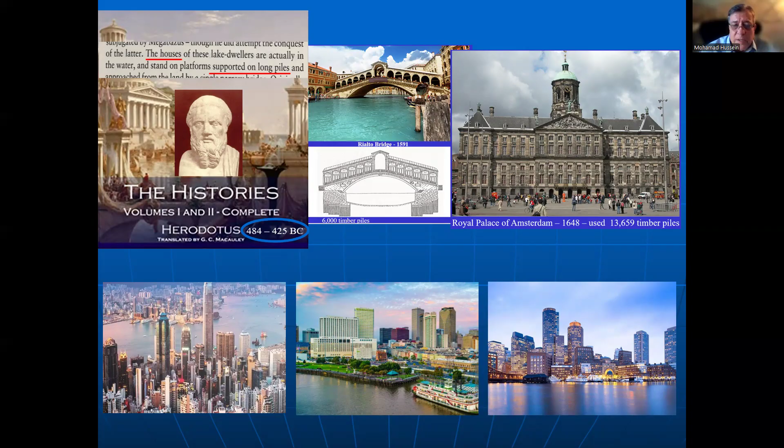So the presentation will be about deep foundations, their different types, and testing methods for geotechnical load-bearing capacity and structural integrity evaluations. Deep foundations have been used since antiquity. Herodotus mentioned driven piles 2,500 years ago in his writings. In fact, we still have structures nowadays that are hundreds of years old supported on deep foundations. One may say that deep foundations are what make our civilization possible by allowing us to build all of the structures needed for modern civilization living. In today's practice, deep foundations are used to support all types of structures and all kinds of geotechnical conditions to resist all kinds of load combinations.

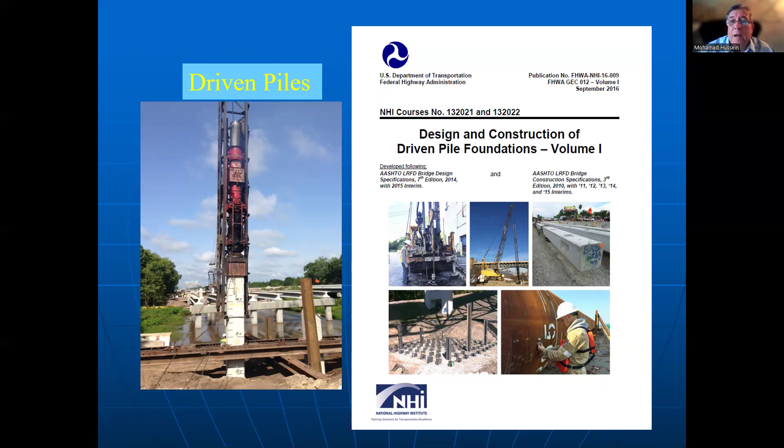Deep foundations can be divided in a variety of ways. I will divide them today into three major categories, including driven piles. By the way, there is a 3-volume manual on design and construction of driven piles available to you for free that you can download in PDF form from the website fhwa.dot.gov. At the end of the presentation, I will indicate to you my email address. If you'd like, I can send you a link to all of what I'm going to suggest to you today. So we have driven piles.

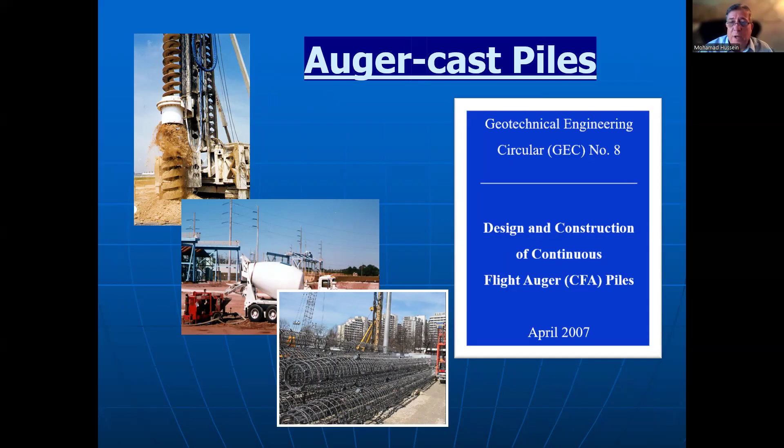We have auger cast piles that are a type of cast-in-situ foundation. There's also a manual for that you can download. And drilled shafts. So these are the three different types of deep foundations I will be talking about today. There is a 2-volume drilled shaft manual as well that you can download from the website.

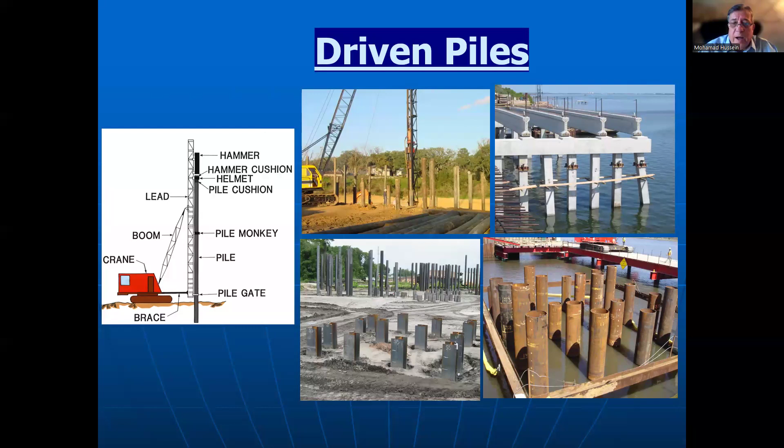Driven piles consist of wood piles, timber piles, concrete piles, and steel piles. Timber piles are typically used to support lightly loaded structures. There is another manual here you can download for free on the internet for the design and construction of timber piles. Steel piles come in 2 varieties, H-section and pipe piles.

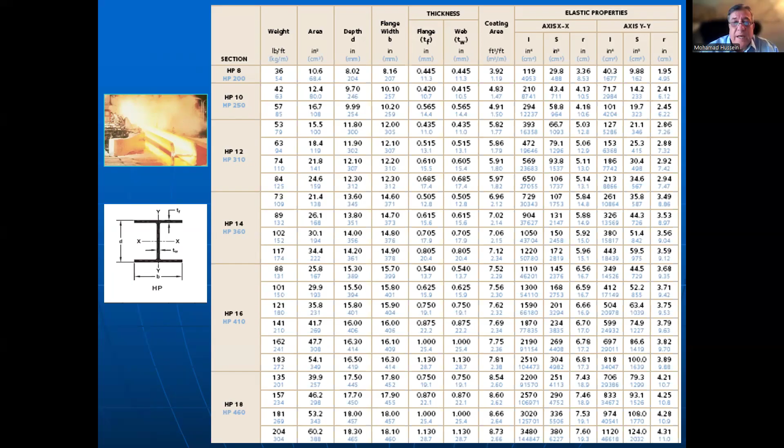There are about 20 different standard H-pile sections available for use, and there are design tables to assist you in the design of these different sections and cross sections of H-piles. Steel pipe piles come in a variety of sizes, ranging in diameter from a few inches to a foot or two, to maybe 5 feet, to more than 10 or 15 feet. So they range in size, diameter, wall thickness, and length as needed.

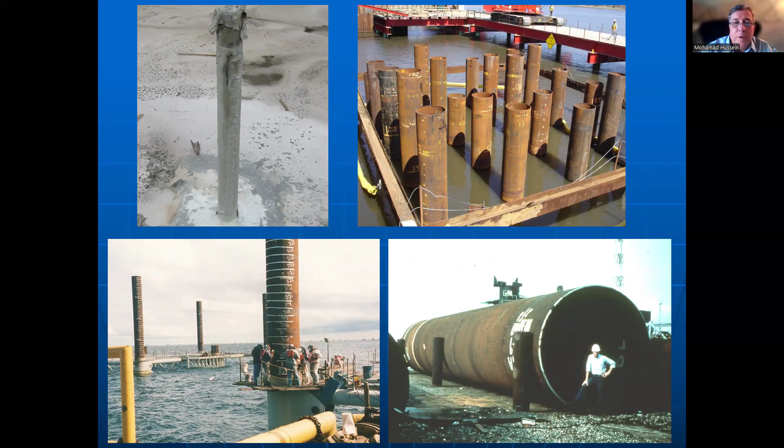Concrete piles are typically pre-stressed concrete piles, having a compression strength of about 6,000 psi, or they can be post-tensioned and may have a strength of maybe 10,000 psi. The newest development in concrete piles is the use of ultra high performance concrete in driven piles, with strength that can be upwards of 25,000 psi.

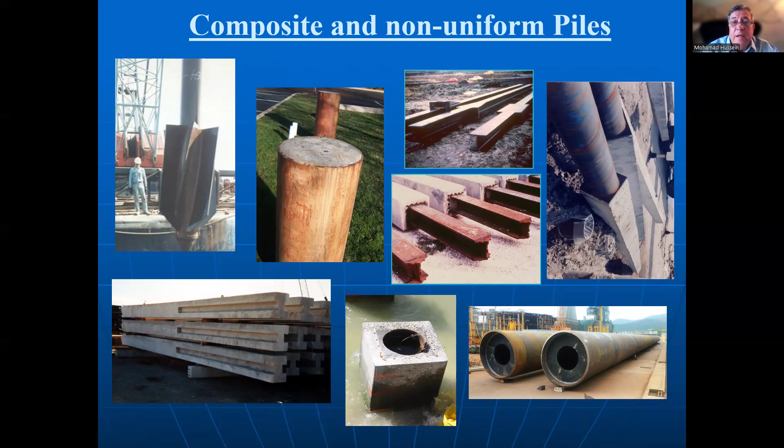Piles can also be composite and variable in sections. They can be different combinations of steel and concrete and can have highly variable profiles depending on the need for the foundation design and the loads they're supposed to support.

There are hundreds of different pile driving hammer models available to install and drive these piles into the ground, and they can operate by hydraulics. We may have hydraulic hammers, air hammers, diesel hammers, single acting or double acting. So there's a variety of different options available for the driving of these driven pile foundations.

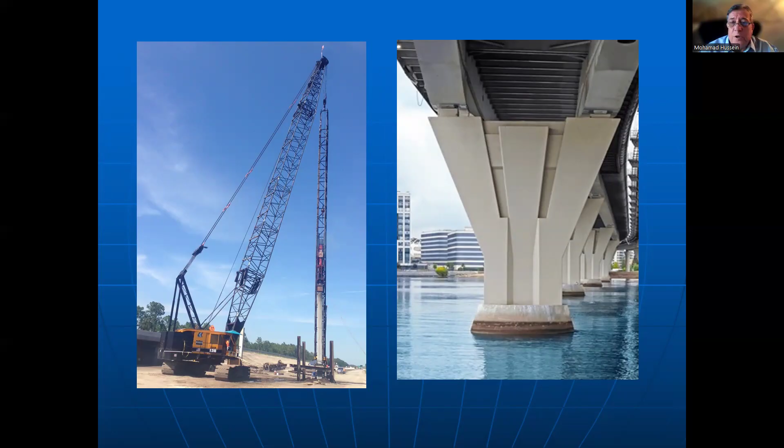So we drive piles individually into the ground, typically in a group. We may drive a group of piles to support the structure we're trying to found. So this is a pier foundation, and this may be a building. We will drive a whole lot of piles, large pile groups, to support the various structures.

During pile driving, the soil resists the pile by dynamic pile driving resistance dynamically. However, when we use the pile as a foundation unit, we need its static load bearing capacity. And there is a difference between the static load bearing capacity and the dynamic pile driving resistance to driving.

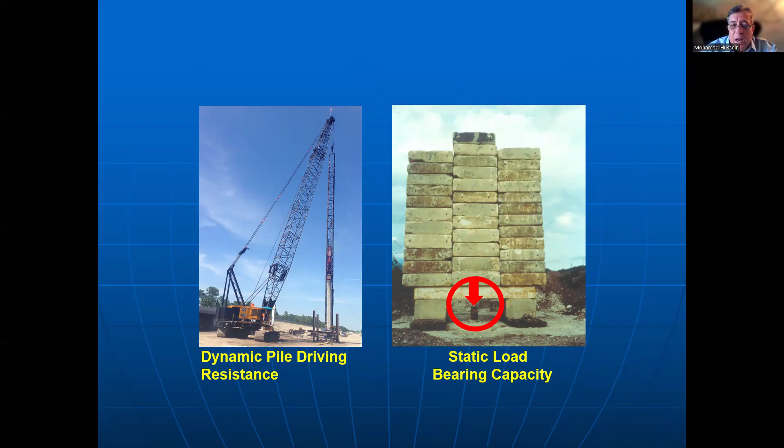So the best way to evaluate the static load bearing capacity after we have driven a pile is to actually perform a full scale static load test, as we see in the picture on the right. We can perform a static load test by using dead weight on top of the pile to see how much it will be able to support statically.

Or we may use reaction piles to support the reaction beam. So we put a reaction beam on top of the pile, we put the hydraulic jack, and then we load the pile hydraulically, and we measure the corresponding load and displacement. So incremental load and corresponding displacement.

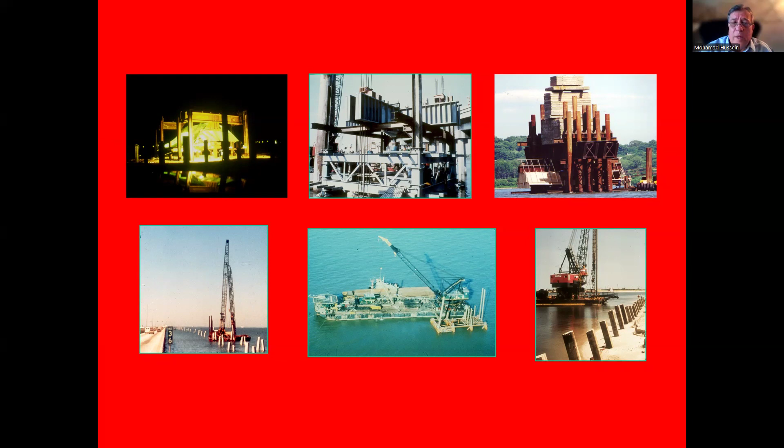So while static load testing is the best thing we can do to evaluate the static load bearing capacity of the pile, it is a very time consuming process. It's very expensive. It may cost 100,000, 200,000, or maybe 500,000 or more to perform a static load test. And in some cases, it's just physically impossible to do. Others may require numerous of these tests on the project. So there are limitations to that approach.

So what we're trying to do is find a relationship between the static load bearing capacity and the dynamic pile driving resistance. In other words, we will try to relate the driving resistance of the pile penetration into the ground, as typically measured by blows per foot or blow count of pile driving, and the tons, the static tons the pile will be able to support in service.

More than just trying to find a relationship, we want to have an equation of however many blows per foot it takes to drive the pile into the ground and how much tons it will be able to carry. This is a nonlinear relationship that we will try to quantify now.

It has been known for a long, long time, since antiquity, that the more energy, the more work it takes to drive a pile into the ground, the more the pile will be able to support. If a pile goes down to the ground easy, as opposed to being very hard to drive, then the harder to drive, the more load it should be able to support.

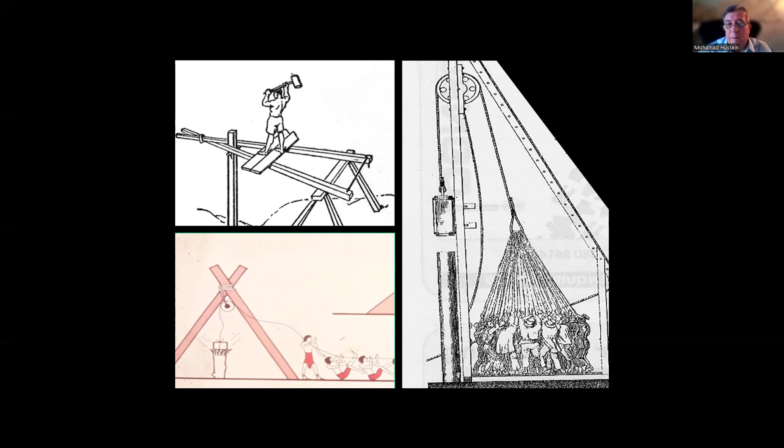So that is kind of a common sense feeling that in 1888, somebody called Mr. Wellington tried to formulate and equate the work it needs to drive a pile and the resistance the pile will be able to support. So this is called the energy approach.

If we know the weight of the hammer W, the drop height H, and then we hit the pile with the hammer, it penetrates a given distance into the ground S against a resistance R, then we have equilibrium. So we have a relationship WH equals RS, so we can back compute R, which is the resistance of the pile to pile driving.

This is actually pile driving resistance, not the static load bearing capacity. A lot of people try to improve on that very simple relationship from 19th century technology, and there are many of these on record, like 400 of them. They are nothing but a variation of the same approach. Some can look complicated, but really not much improvement over the basic equation, so not very good to use nowadays in the 21st century.

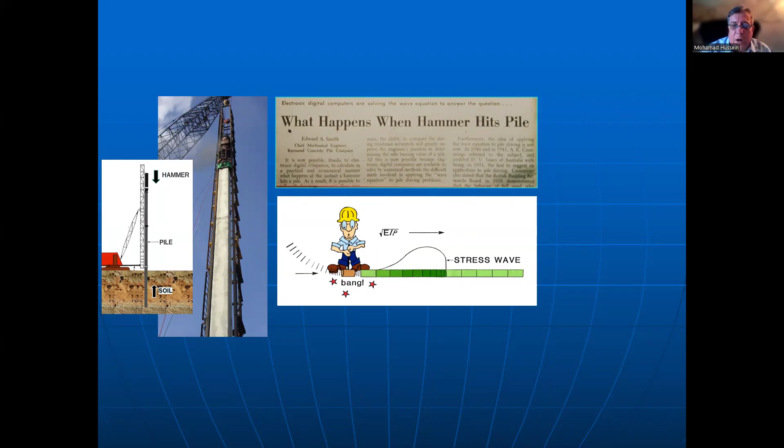So let's look further into what happens when the hammer hits a pile. What are the fundamental mechanics of pile driving? It has been realized that pile driving follows the process of wave propagation, one-dimensional stress wave propagation. When the hammer hits a pile top, a compression stress wave travels elastically in the pile back and forth at a very high speed, like 15,000 feet per second.

Mr. Smith in the 1950s realized that and wrote a computer program called the Wave Equation Analysis of Pile Driving. In fact, this computer analysis was the very first application of digital computers in civil engineering. Mr. Smith wrote this program to be used in-house in his company called the Raymond Concrete Pile Company. Later on, the United States government commissioned a group in Ohio, which later became the GRL group, my group, to write a public program for the analysis of pile driving using the wave propagation principles.

So the WEAP program, or GRL WEAP program, is a simulation program using numerical analyses that follows the stress wave down the pile and the soil resistance against pile penetration, and comes up with this relationship of blow count and static load bearing capacity by taking care of the dynamics of the soil resistance damping effects.

So for any pile drive, for any capacity we need the pile to support, for any design load times the factor of safety, ultimate capacity, this equation, this program will tell us how many blows per foot we need to continue driving the pile to achieve that resistance. That is what the inspectors use on the job site as quality control and quality assurance for pile driving, to make sure that the pile reaches the required blow count that achieves the required resistance.

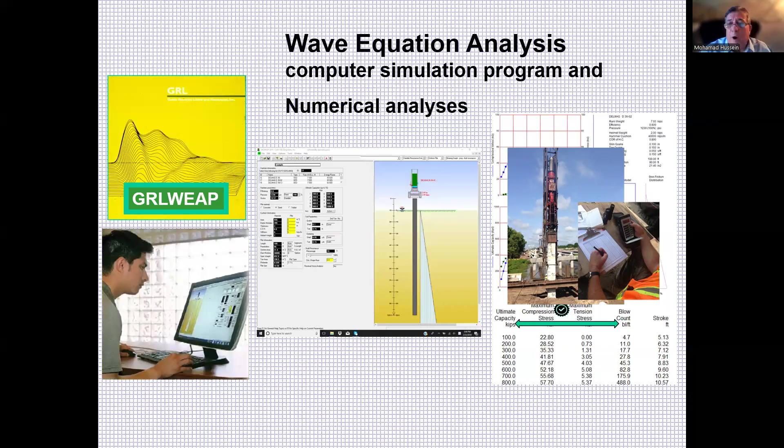However, being a computer program, a simulation program, it relies on assumptions. There are a bunch of assumptions one has to assume and plug into the program to come up with results. Although it is a very powerful program, its reliance on assumptions means that it has potential sources of error.

For example, hammer performance. We have to assume a certain level of hammer performance in order to make sense of the hammer driving blow count as it relates to the soil resistance effect. Because blow count is not only a function of resistance, it's also a function of hammer performance. So if we are off on the assumption of hammer performance, we will be equally off in relating the blow count to that static load bearing capacity.

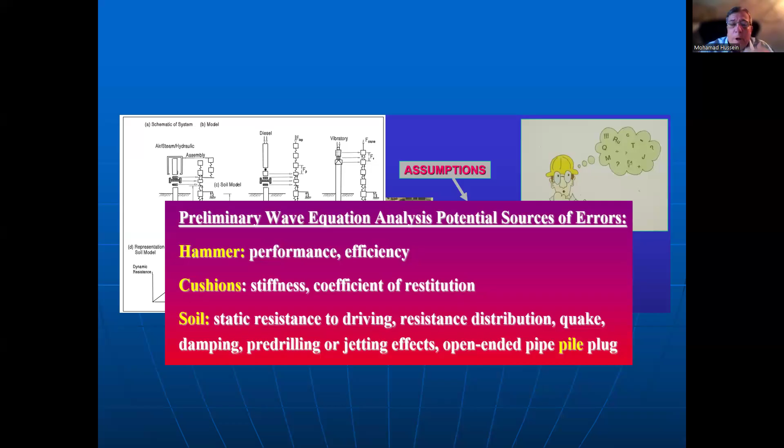But that's something that has to be assumed. Soil-pile interaction has to be assumed as well. A simple example is the open-ended steel pipe pile. When we drive an open-ended steel pipe pile into the ground, it may act like a cookie cutter, or it may plug. Either case will have a very different relationship of blow count and load bearing capacity. We don't know if the pile is going to plug or not, but we have to assume that ahead of time. Because of all of these assumptions needed, there are potential sources of error in the analyses.

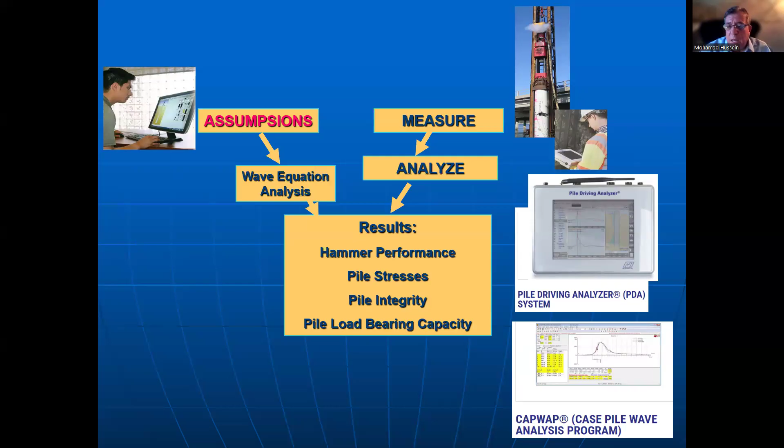So instead of assumptions, what if we were to go out on the job site and take measurements? We will measure what we need to know, analyze it, and come up with results. These measurements are typically done with a computer unit on the job site called the Pile Driving Analyzer, PDA, and the analyses are done with a computer program called CAPWAP, which is a wave equation analysis based on the measurements on site.

So let's start from the very beginning. Again, this is a static load test. We need all of this dead weight, all of this load, to statically load test a pile. We need dead weight.

What if we were to think a little bit outside the box? What if I was to take a very small portion of that dead weight for the static load test, a small percentage of it, put it in a guide, lift it up high enough and drop it in such a way that it gives me the same load on the pile as all of that dead weight load? So both of these processes, both of these procedures, can give me the same load on the pile.

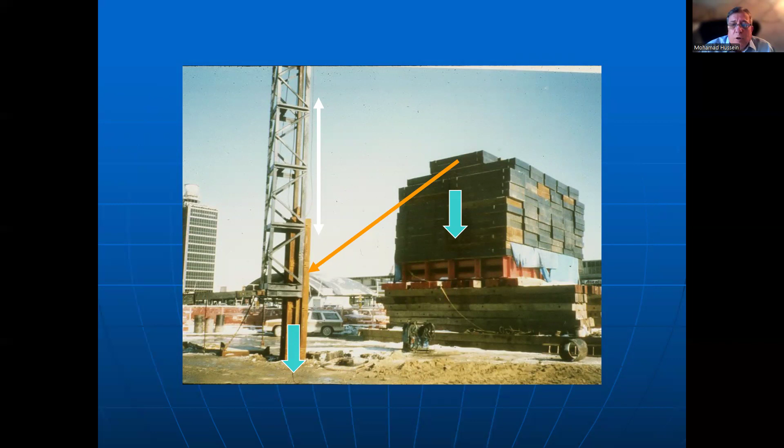So if I can take a small piece of that, I don't need the whole weight. I can dynamically duplicate or replicate the load testing effect. As a matter of fact, I don't have to do any of that — this is being done for me for free.

It's called the pile driving hammer. As the hammer pounds the pile into the ground during pile driving, it's loading the pile with every blow. All we have to do is put instruments on the pile and take measurements during pile driving. This constitutes a dynamic load test, as opposed to a static load test. Dynamic load testing is standardized by ASTM through standard designation D4945.

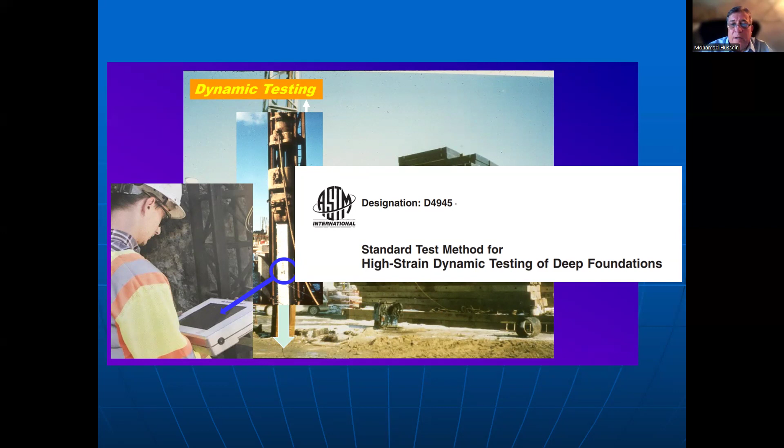Dynamic load testing is nothing but taking measurements on the pile under the impacts of the hammer during pile driving. These measurements consist of a strain transducer measurement, measuring the strain and therefore the force, and an accelerometer. So we need two units: a strain gauge and an accelerometer. The strain gauge measures the load, and the accelerometer measures the motion.

That's like the static load test — remember, we measured load and movement statically. Now we will measure the same thing dynamically under each and every hammer blow.

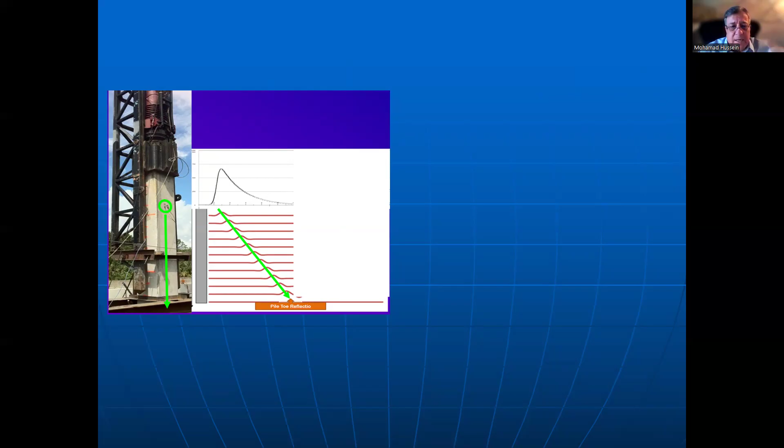So when the hammer impacts the pile top, we put our gauges on the pile. The gauges feel the impact of the hammer, the stress wave as it passes. The stress wave goes down to the bottom of the pile, reflects, and comes right back up where the gauges feel it again. So this is the signature of one blow.

This is a dynamic test result of one hammer impact, showing the impact at the top of the pile and the reflection from the bottom of the pile versus time. This is more like 20 milliseconds, but it can be resolved by the computer.

Since we are taking measurements under each and every hammer blow, we have a complete record of the entire pile installation. If you look on the bottom left-hand side, you'll see the number 1,813 — this is however many blows it took to drive this pile, about 1,800 blows to drive it to 125 feet penetration.

We can group all of these blows into each foot of penetration, because the inspector on site is counting how many blows per each foot of penetration. Each foot will get an average, and this is the same thing shown graphically versus penetration.

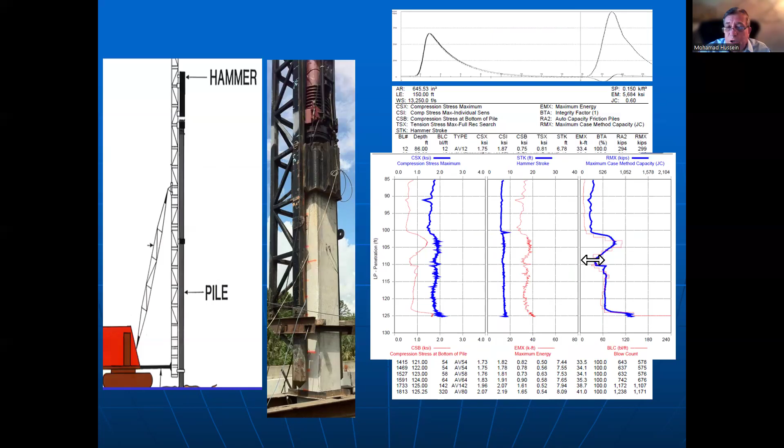If we look on the right-hand side, the blue line versus penetration depth is the static load-bearing capacity of the pile, and the red line is the blow count in blows per foot of the hammer. So now we have the relationship of blow count and static load-bearing capacity during pile penetration depth for each and every foot of driving.

This information can be used to assess and evaluate the hammer performance, the pile performance, and the soil performance for each and every hammer blow.

The hammer runs at a clip of about 50 blows per minute — let's say approximately one blow every second. Between these blows every second, we have all of these results, which I will describe next, that have to do with the performance of the hammer, the pile, and the soil.

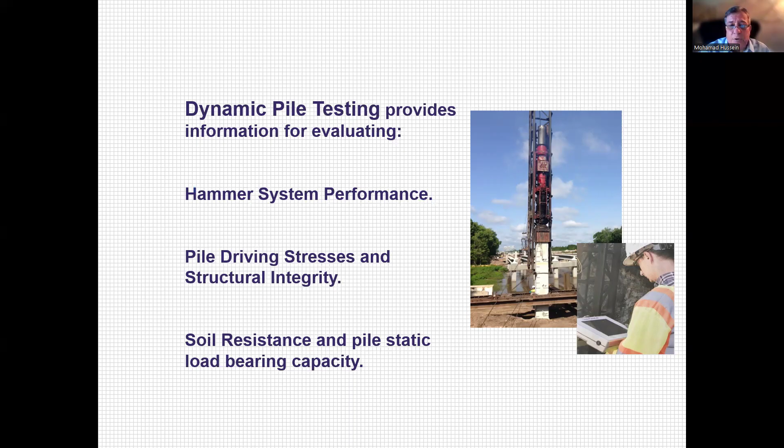The hammer has a rated energy, a maximum potential energy equal to weight times drop height. Every hammer is rated that way. That's its potential energy — it will fall and compress a cushion on top of the pile, accelerate the mass of the helmet, compress a plywood on top of the concrete pile, and finally reach the top of the pile in what we call transferred energy.

So the best measure of the performance of the entire pile driving system is by measuring how much transferred energy actually reaches the pile top. How much do you think is the ratio of transferred energy to the maximum potential rated energy of the hammer? How much do you think the pile actually receives from the hammer?

Well, that depends on the mechanical condition of the hammers, on the state of maintenance, the state of mechanical condition of the cushions inside the hammer, and also the plywood that we put on top of the concrete pile to cushion it so we don't damage the pile. All of these play together in giving us this high variability.

This is why I was concerned when we talked about the wave equation analysis by simulating the hammer, that we have to have a good measure of the efficiency of the hammer if we have to make sense of its blow count in establishing pile load bearing capacity. It can vary widely, so that's why the measurements are needed for the performance of the hammer.

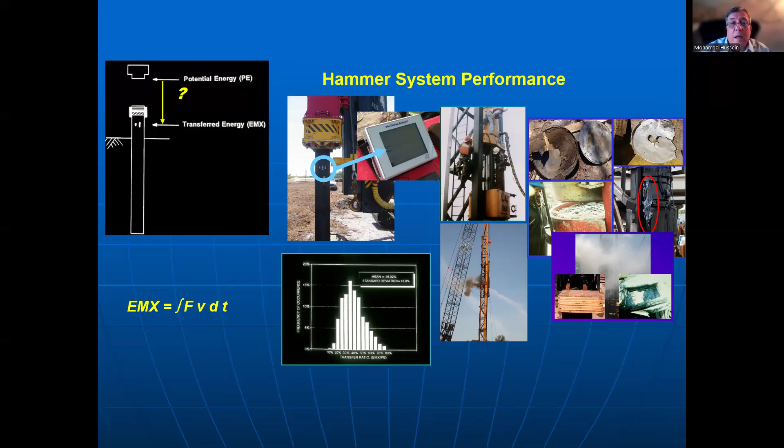During pile driving, the pile undergoes a very complex state of stresses that includes compression, tension, bending, and torsion. Repeatedly, in the previous case, it took 1,800 blows to drive the pile, having to hit it so many times to get it into the ground at the maximum possible stress level. So having done that, we were curious and wondering how did the pile feel about that process of installation.

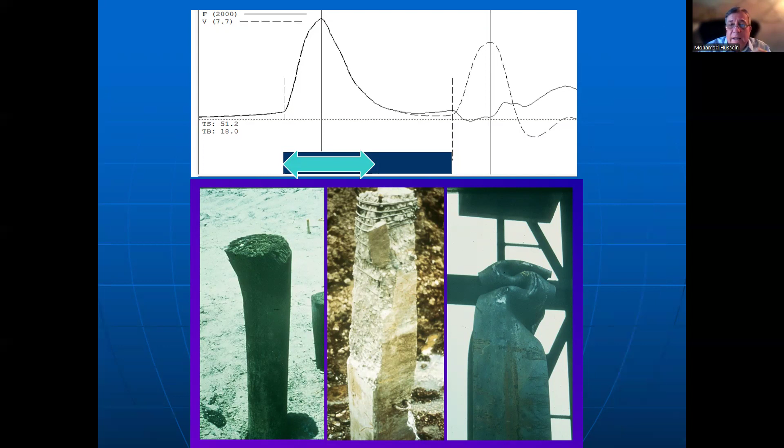We extracted this one pile and found it to be damaged. In fact, many of these piles were damaged on this particular project. That is why it's important to take measurements of the load, of the force, of the stress in the pile under hammer impacts, in order to avoid damaging the pile top, as we see in this case.

From the pile top measurements, we can follow the stress wave as it travels down the pile length, and we can calculate the stress level in the pile at any location X, including the full length of the pile. So now we can calculate how much stress the pile bottom has.

When we drive piles to a large end-bearing resistance, a very high end-bearing resistance to a very hard rock let's say, the stresses at the bottom of the pile could potentially be twice that at the top of the pile, because the stress at the top of the pile in compression comes from the hammer.

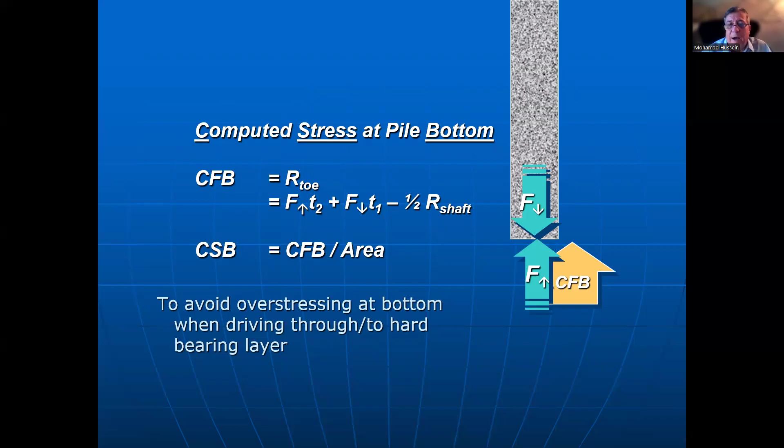That compression stress from the hammer travels down the pile length, reaches the pile bottom, and activates an equal and opposite reaction, also in compression. Both of these compressions add up at the bottom of the pile, so that we can have potentially twice as much stress at the bottom than we have at the top.

This particular project, they were driving steel pipe piles into very hard rock, and you notice the top of the piles has no damage at all. But they thought they may be driving these piles to different depths into that hard rock, until they realized after extracting one of these piles that they were not penetrating the rock, but were in fact damaging the tip of the pile due to the doubling effect I just described at the bottom of the pile from very hard end-bearing resistance.

Here's another case also with a damaged pile driven to very hard end-bearing, and you see it in the data. If you look at the data on the left-hand side, the first peak is the impact at the pile top. The second peak on the right is a reflection from the pile toe, and the intermediate little reflection indicates the reflection from the damaged location in the pile.

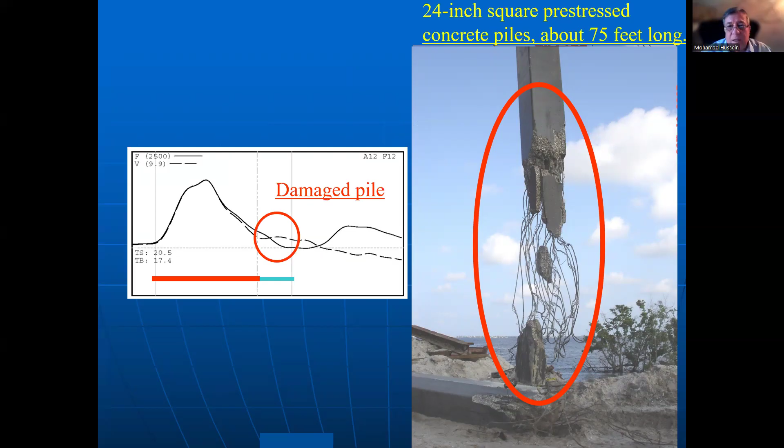That's a steel pile damage, and this is a concrete pile damage also the same way, where we see the impact and then an early reflection in the data before the reflection anticipated from the pile toe, indicating damage.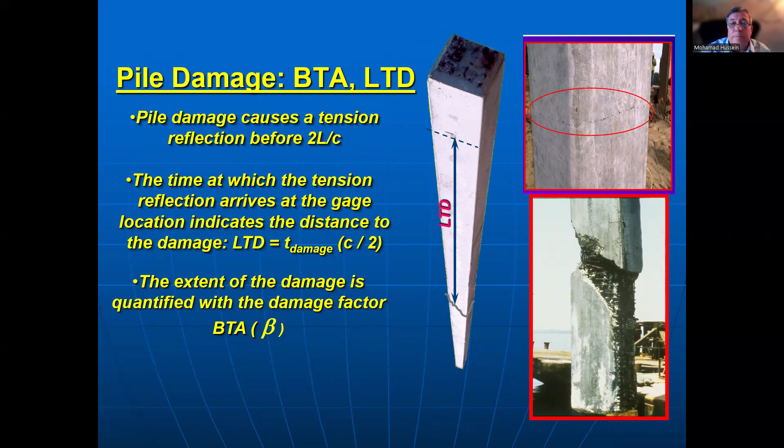So should there be any reflection in the data indicating damage, then from the time of that reflection and the amount of reflected energy, we can calculate how much damage the pile has. We can calculate the location of damage and the amount of damage, whether it's a small crack or a very large damage or complete break. That can be indicated from the measurements at the pile top. Remember, we're doing this for each and every blow of pile driving.

So we talked about hammer performance and pile performance. Now we'll talk about soil performance. When the hammer hits the pile top, it forces the pile into the ground, generating a stress wave that travels down the pile. When the pile moves into the ground, it activates soil resistance, activating skin friction and end bearing.

These activated soil resistance forces also generate a stress wave in the pile going upwards in compression. So now we have a wave going downward in the pile from the hammer, and a wave going up the pile from the soil resistance effects.

Depending on where that soil resistance is located, whether in skin friction or end bearing, it will arrive differently at the pile top. So from the time of arrival of these stress waves at the pile top, the waves going up the pile, we can tell where they were generated - in skin friction or in end bearing.

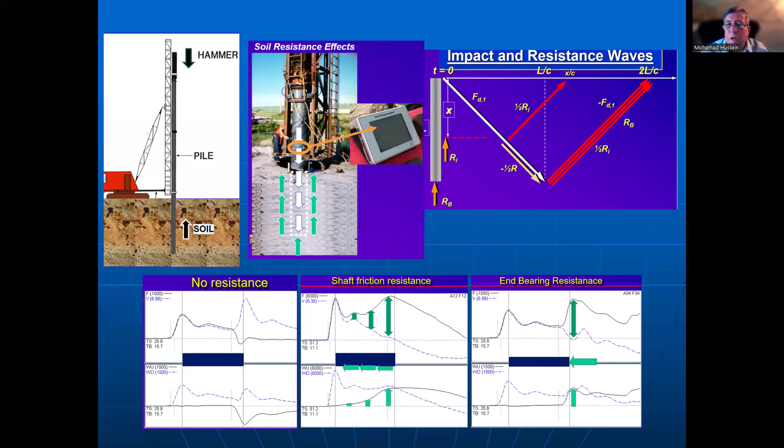We can also take that measured data and further analyze it to see how much dynamic resistance we have and how much static resistance we have at each length of pile. Let's say every 5 feet of pile length, we know how much resistance we have in skin friction and how much we have in end bearing, using this CAPWAP program.

So now, if we know the pile elasticity, we know its length, we know the skin friction resistance along its length and end bearing, we can simulate the static load test. So this is a simulated static load test, load versus movement from the dynamic measurements, without having to run a full-scale static load test. So how do these two compare?

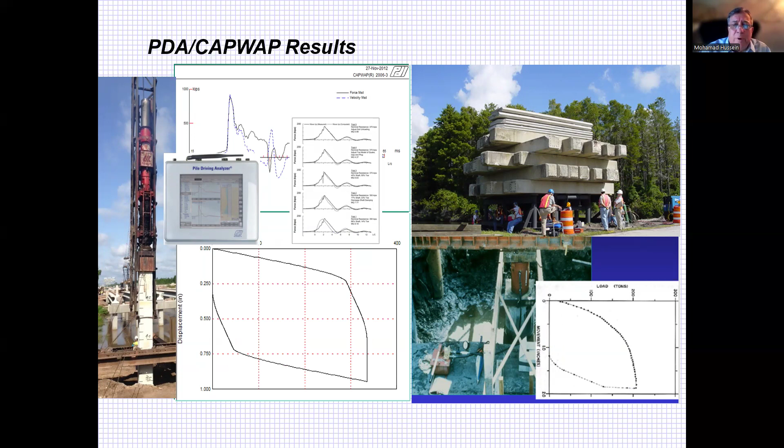How do they correlate? There have been numerous studies over the last 50 years on various projects and academic studies that correlated the results of a PDA, CAPWAP dynamic analyses, and a full-scale static load test. So this is one of these ASCE published cases.

So this process of dynamic load testing is typically applied on a job site by using what's called a test pile driving program. The design engineer will select a number of piles for the project to be driven ahead of construction as test piles.

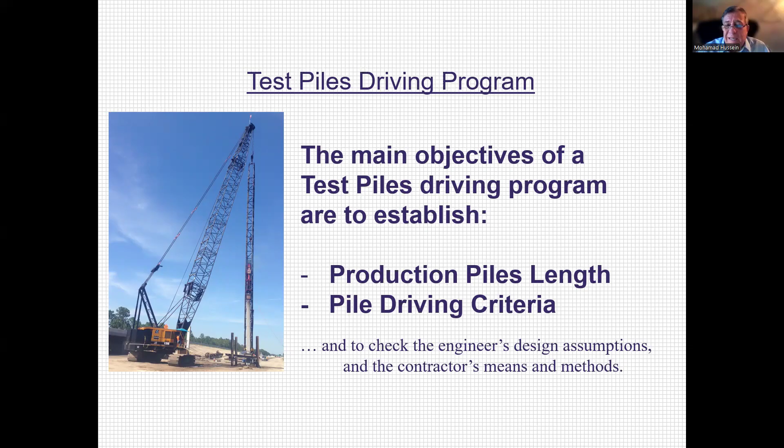The purpose of this program is to drive the test piles, get the information, and come up with production pile length for the rest of the project and production pile driving criteria to install the production piles with. And to also check the engineer's design assumptions and the contractor's means and methods.

So a test pile program typically starts with driving the pile and dynamically testing it with the pile driving analyzer, analyzing the data with the CAPWAP program, refining the wave equation analysis with the findings from the field measurements, issuing a pile driving criteria relating blow count

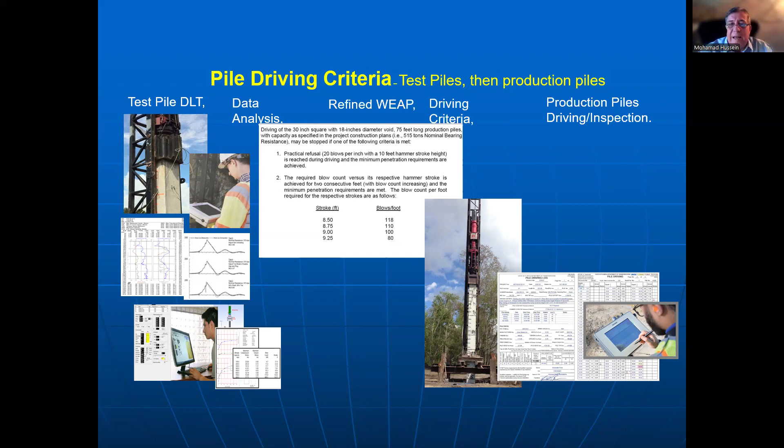and the required capacity, and then giving that to the inspection on the job site. The inspector then can apply the driving criteria to the remaining of the piles on the job site. So that is a typical process in which this dynamic testing is utilized in production.

However, this process can be expensive, can be time-consuming, not warranted, or ineffective in certain cases. That is why, as an alternative to that conventional application of a test pile program, some projects drive production piles without test piles, but with 100% dynamic testing.

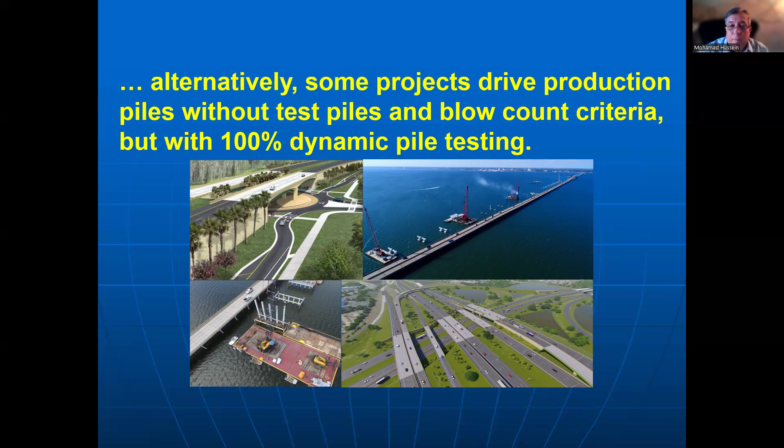This 100% dynamic testing is now required. For example, in Florida, the highway department requires that each and every pile they drive on their projects be 100% dynamically tested. The benefits they found to that to be it optimizes construction efficiency and economy, and it increases engineering reliability.

Increasing engineering reliability means that if the design engineer knows that each and every pile has been tested and verified for capacity and integrity, then the design can utilize a much more efficient foundation. In other words, a much lower factor of safety would be needed as opposed to not knowing all of that information.

The contractor also has found that having 100% testing without having to do a test pile program makes the project more efficient and more economical and faster to do. So that's a new trend now in the pile driving foundation industry.

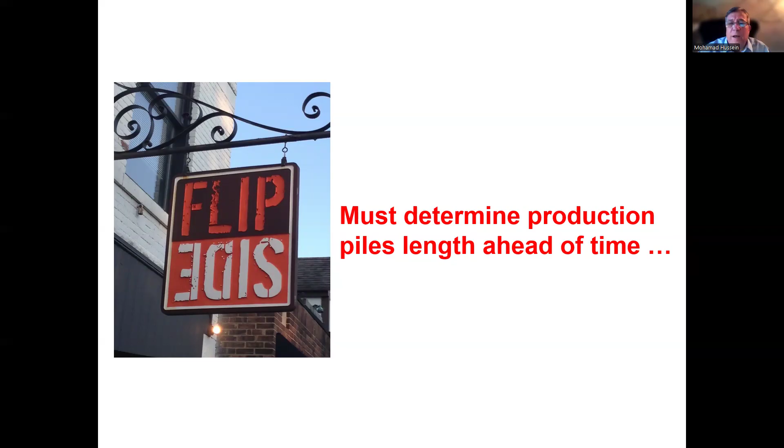On the flip side to that, however, one must determine production pile length beforehand. So without the benefit of a test pile program, the design engineer must come up with production pile length, because when we say 100% testing, all of the piles will have been preformed and shipped to the job site to be driven and tested at once. So one would have to predetermine a production pile length beforehand, which can be tricky in many situations.

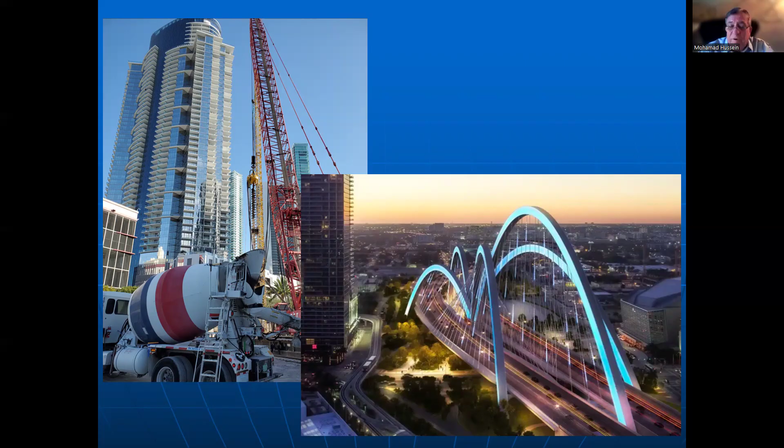That was driven piles, aside of the deep foundation group. Now we will move into the cast in situ deep foundations, starting with auger cast piles. Auger cast piles are used typically on buildings, but now more recently on bridges as well, and has become an alternative to driven piles as a deep foundation solution. This is a typical view of an auger cast installation rig and its various components, and this is the process an auger cast pile is constructed with.

It relies on a continuous flight hollow stem auger. This auger has a hollow stem in the middle of it and a continuous flight. The design engineer decides how deep we should auger this hole to. Once we reach the depth, they withdraw the auger, and push grout to the bottom of the hollow stem and fill it with grout. By the time the auger makes it all the way up to the top of the ground, the hole has been filled with grout. Then they push a steel cage into it. This is a conventional way of constructing an auger cast pile.

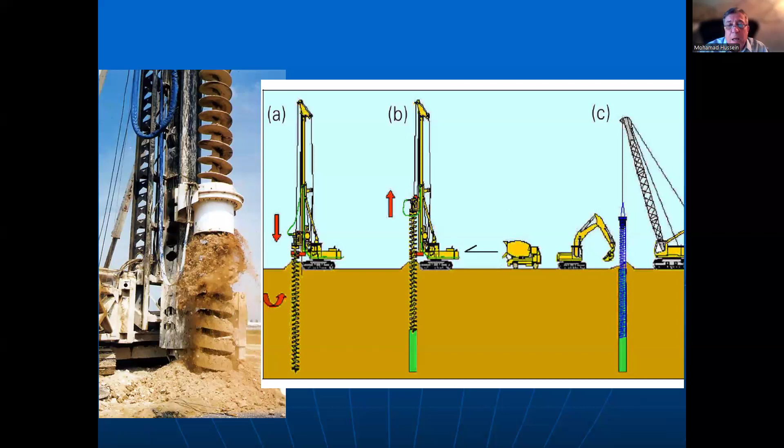Alternatively, at the bottom of the stem of the auger, they may change the direction of the flights, which means that now when we are augering this into the ground, we're pushing the soil sideways and not mining the ground. We're not taking soil out of the ground like we did previously, but actually pushing it, displacing it in the ground. These are called displacement type auger cast in situ piles.

Inspection of these installations, the old way: this inspector is doing the inspection with his foot. What he's doing is counting the number of strokes of the pump that is delivering the grout into the pile versus depth, counting how many strokes of grout the pump delivers every 5 feet of penetration into the ground. Then he can establish a profile of grout versus depth. Of course, there are many things wrong with this antique process.

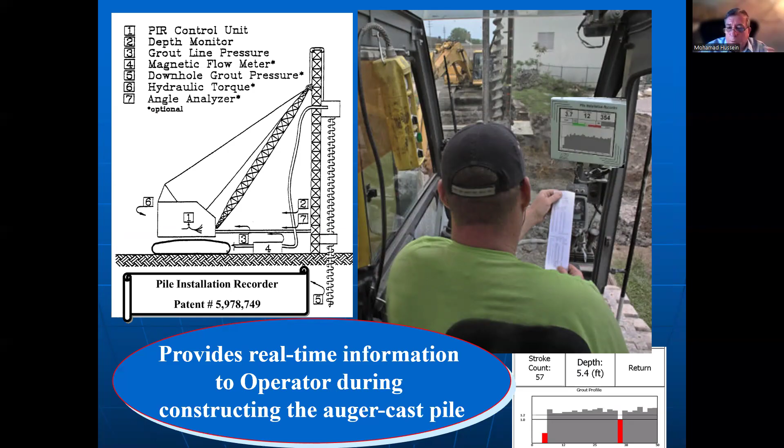Now these rigs rely on automation. We automatically measure the grout volume versus penetration depth and the pressure of the grout, which tells us that we have a good, well-constructed auger cast pile in place.

Drill shafts, on the other hand, are constructed a little differently. They're constructed by drilling a hole into the ground, putting the steel cage in the empty hole, and then pouring concrete in the middle of that steel cage, which will then make its way to the side wall and fill up the shaft. That's a drill shaft construction.

Drill shafts have many advantages. They come in very large sizes at times, 10 feet or more, and 100 feet or more in depth. They carry very high loads, compression and lateral.

If we happen to be lucky enough to have a site where the water table is very low, then we can simply drill the hole, look down it, put the steel cage in, and fill it with concrete. That's an easy construction of a drill shaft situation.

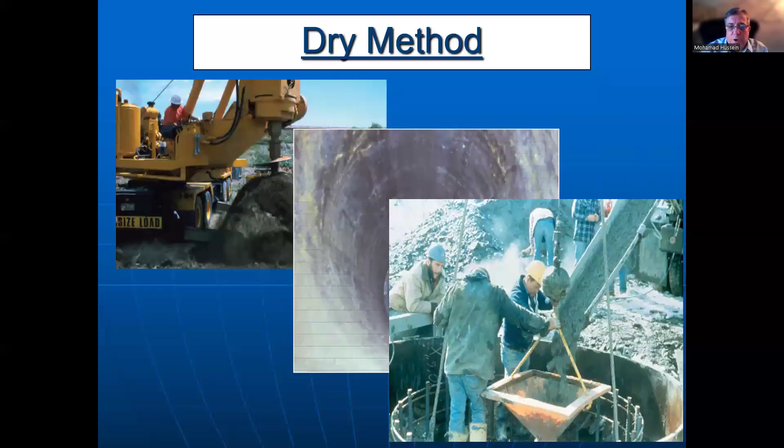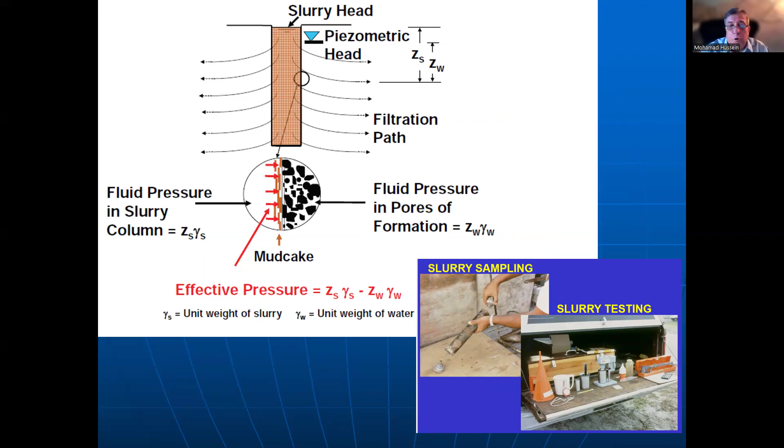However, if the water table is high, then we have to use other means, such as a steel casing—temporary or permanent—in the ground to make that shaft, or we can use slurry. Slurry is a very thick liquid fluid material put in the hole to exert lateral hydrostatic pressure against the pressure of the wall of the hole in the ground so it doesn't fall in. That's how we maintain the hole during construction of the drill shaft.

We construct this drill shaft with concrete from the bottom up. For that, we use a very long tremie pipe that starts at the bottom of the hole. We put concrete in the hopper on top, and we lift the pipe as we make that shaft. Of course, we cannot lift it too fast and be above the concrete, otherwise we may have an issue with the construction of this shaft.

The steel cage design has to be done properly and appropriately. Properly in order to provide structural strength of the shaft with the reinforcing steel, and appropriately in that it has to allow the concrete to make its way outside it to engage the side of the hole, in order to have geotechnical skin friction for this drill shaft. So the opening and the design of the steel has to have enough openings to allow the concrete to flow through it and engage the side of the shaft.

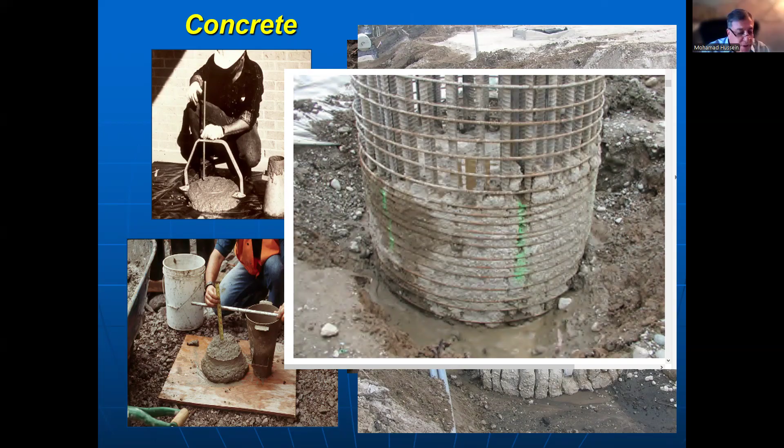Concrete is the same way. It has to be designed with enough strength, obviously, to carry the load, but it also has to have enough workability. It has to be workable enough to pass through the reinforcing cage openings and engage the side for geotechnical resistance. Sometimes it's so bad that it just doesn't make it out, and therefore the shaft will have a problem in its integrity outside the cage and also in geotechnical shaft resistance capacity.

So when we drill the hole, we have to inspect it for a variety of purposes. Number one, we have to inspect the hole for profile. We have to know if the hole is the right dimension, area-wise, and also for verticality. We have to make sure the hole is plumb, because the drill shaft, the hole in the ground, has to be plumb within a small tolerance. Remember, we're drilling this hole like 100 feet in the ground, and we don't want it to be off plumb by too much.

At the same time, we have to test at the bottom of the hole if we have any debris, any loose material, because we are counting on end-bearing resistance of the drill shaft when we pour the concrete. All of this before we put the steel cage and before we pour the concrete, we have to do these inspections, these tests.

The profile and verticality are done with this equipment called SHAPE equipment, which is sent down the hole even with slurry in it, and then sends signals and waits for reflection from the side, giving us a profile of the hole in the ground. It also measures the verticality of that hole to make sure everything is within tolerance.

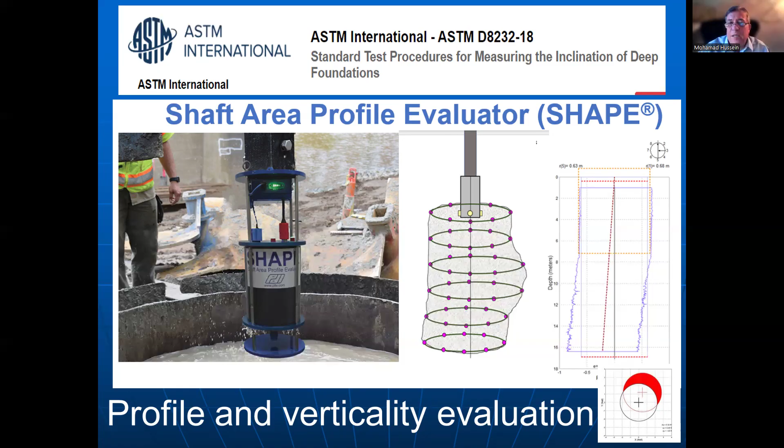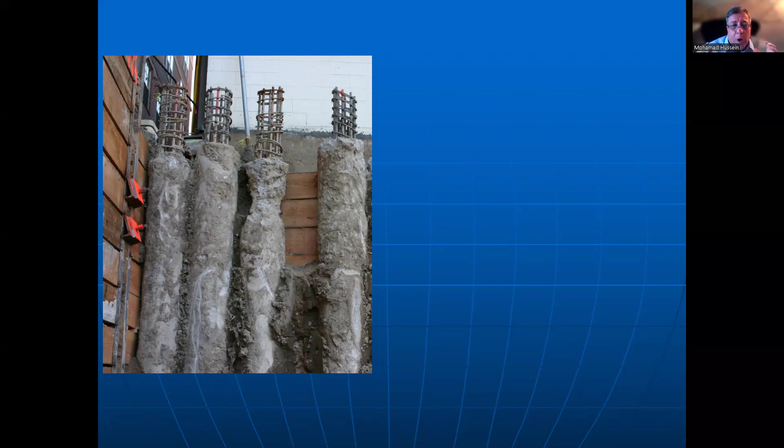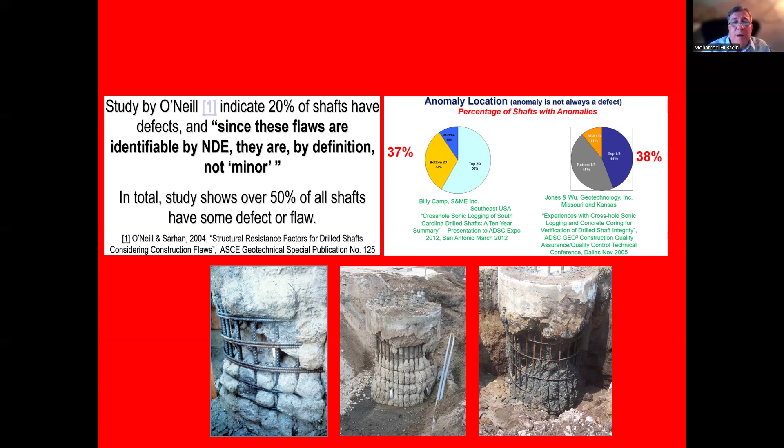So after we do all of that, the shape of the drill shaft and auger cast pile may be perfectly cylindrical, great, well done. Maybe they can be a little bit off, maybe they're okay, but at times they can be very bad. So the integrity of them could be bad because of a variety of reasons having to do with construction, ground conditions, etc. There have been many studies done by universities, highway departments, and owners showing that somewhere between 20 to 50% of all these cast-in-situ foundations have some kind of structural issue.

So therefore, we have to test for integrity of these cast-in-situ elements. The factors affecting the shape of these elements and integrity underground have to do with the geotechnical conditions, the design itself, including the reinforcing cage, the concrete, the installation means and methods that the contractor uses, and the workmanship of the contractor. Very important to have a good product.

Integrity testing checks for flaws and defects. A flaw is a deviation from the planned shape or material quality. A defect is a flaw that is so bad it will affect the performance of the shaft or its durability.

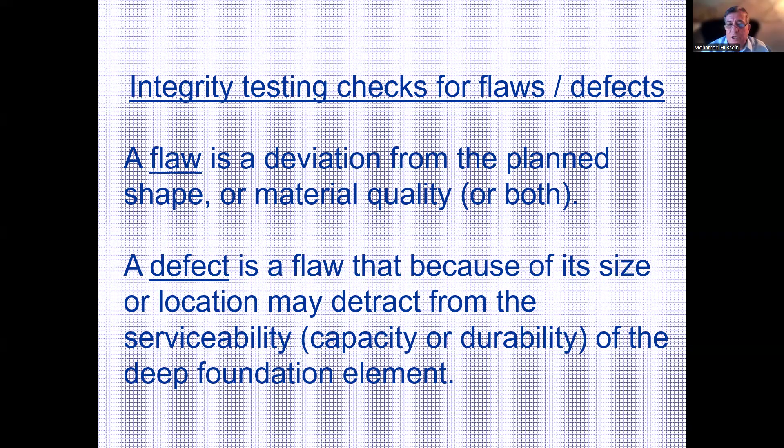The easiest, most expedient, and least expensive way to inspect for integrity is by low strain testing, PIT testing. Low strain pile integrity testing, ASTM designation D5882.

This test is based on putting a sensor on top of the pile or shaft and hitting the top of the shaft with a small handheld hammer, sending down a low intensity, low strain stress wave that goes down to the bottom of the shaft, reflects, and comes back. That tells us the shaft is fine.

Should there be a defect at some location in the shaft, that defect will send back an early reflection. So the engineer is testing the shaft at the top, and we see the impact, the stress wave goes down and reflects from the bottom of the shaft, 25 meters long. No problem with this shaft because there are no early reflections, compared to this shaft that has an early reflection.

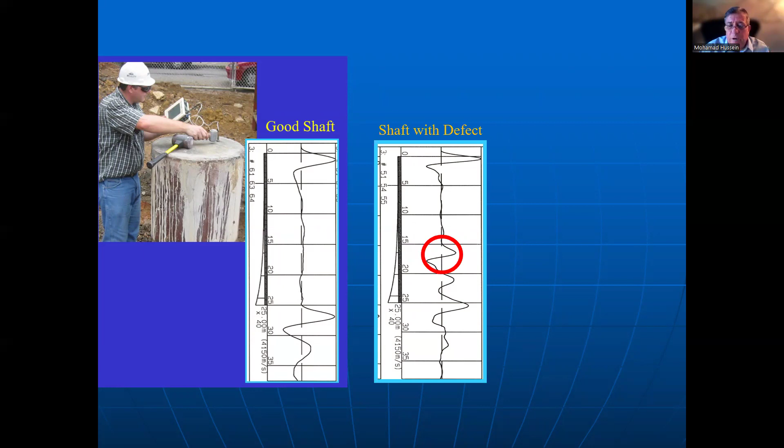At 15 meters depth, this shaft has a defect because it sent back an early reflection before that anticipated from the shaft bottom. Depending on the location of this reflection and the amount of energy reflected, we can simulate that by signal matching and estimate the location and amount of this defect from these pile top measurements. So this is a very simple way to test the shaft, although it has many limitations having to do with the size of the shaft, the length, the diameter, the resistance, and the type of defects that can be obtained.

This same test can also be applied to test for unknown foundations, testing of piles under existing structures for unknown length.

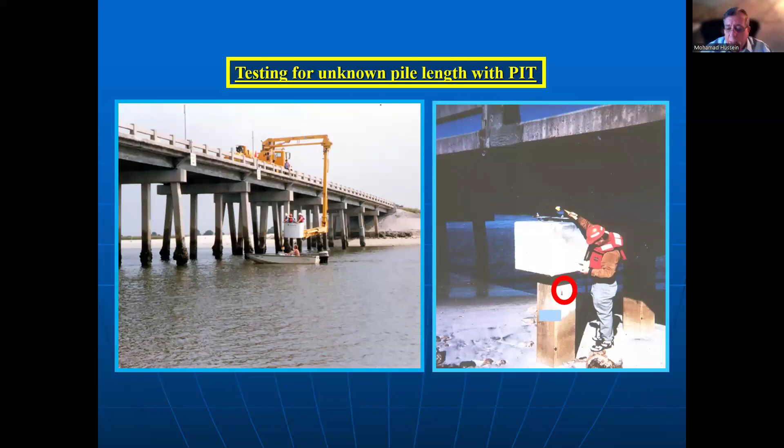Another test typically done to evaluate the integrity of drilled shafts or auger cast piles is cross-hole sonic logging, CSL testing. It also has an ASTM designation, D6760.

This test consists of casting into the shaft, connected to the steel cage, access tubes, 1.5-inch steel access tubes, distributed along the circumference of the shaft. The number of access tubes needed is equal to the diameter of the shaft in feet. So a 5-foot diameter shaft requires 5 of these access tubes.

The access tubes are cast into the shaft, and then we take these access tubes after we put the concrete and wait until the concrete cures and hardens. Then we take these access tubes two at a time and send a transmitter and a receiver into them, lift them up, and scan between these two tubes.

Then we take these two tubes, the 4 or 5 tubes, two at a time, and scan the entire volume of concrete between the reinforcing cage bars. The number of scans we can do depends on the number of tubes, and the formula is n squared minus n over 2, where n is the number of tubes. So for a 5-tube shaft, we can do 10 different profiles, taking the tubes two at a time, scanning all of the volume of concrete in between the access tubes inside the reinforcing cage.

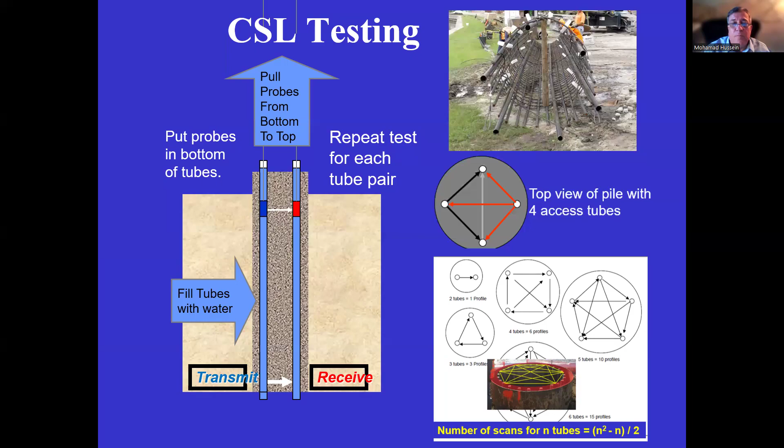If we have good concrete, the signal sent from the transmitter is received by the receiver well at a predictable time. However, if we have a defect in the concrete at some location down the shaft length between a certain tube pair, that defect, being bad concrete or a void, will delay the signal. So good concrete will send good signal, and a void or defect will delay and weaken the signal as it's being received.

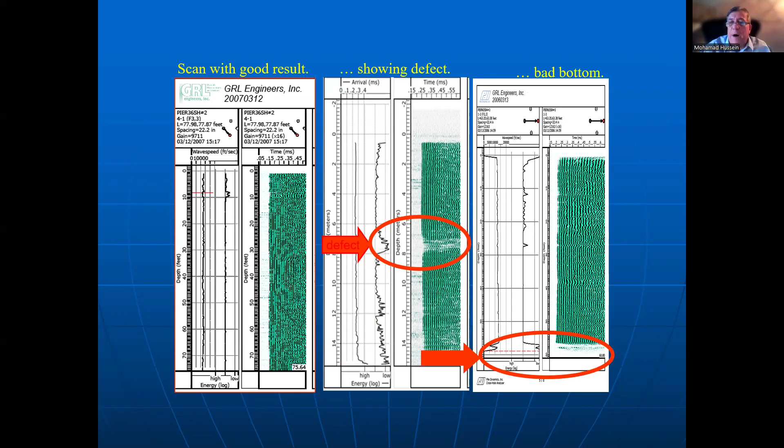These signals are sent and received throughout the entire length of the shaft between the two tubes, so we can stack these signals on top of each other and show results for the full pile length. On the left-hand side, the result of one scan versus length shows very good signal reception. In the middle, we see data with signal loss in the middle of the shaft. On the right-hand side, we see signal loss at the bottom of the shaft. This is how we evaluate this test result.

We can then put all of that information into a 3D tomography program that will tell us the defects in the body of the shaft versus depth and quadrant and location within the cross section of the shaft from these different scans of the various tubes.

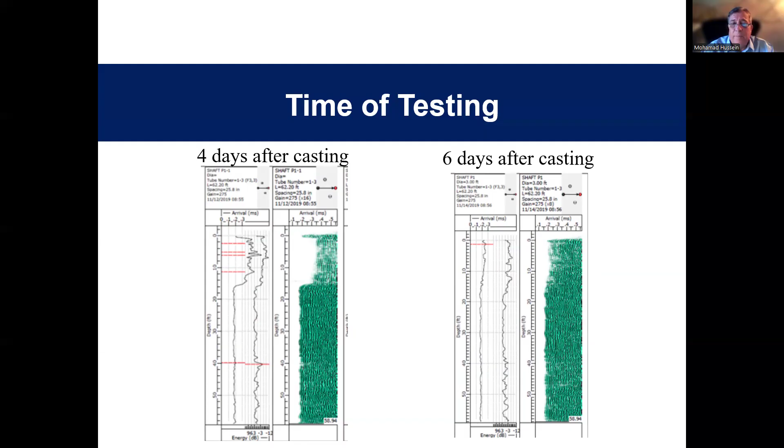Testing has to wait until the concrete has cured, which may take 5 days or a week or so. So the contractor has to wait; the shaft cannot be tested until quite a few days, 5 days or a week, have passed. Sometimes there's debonding between the concrete and these access tubes, which may give us false signals or a bad test result.

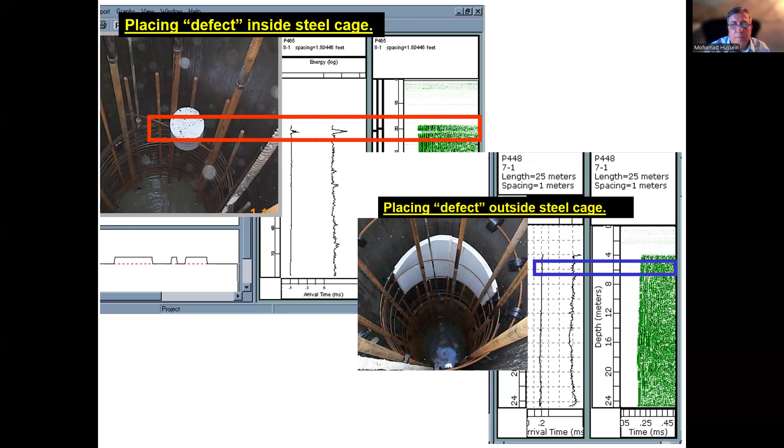It can only test for concrete inside the reinforcing cage and not outside it. The newest method and the most comprehensive method of evaluating the integrity of drilled shafts and auger cast piles is thermal integrity profiling. This method relies on the measurement of the temperature created by the heat of curing of the concrete in the ground.

We know that when concrete cures, it generates heat. So what we're trying to do here is to measure the temperature of the concrete inside the shaft versus depth. And from these temperature measurements, then we will establish the integrity of the shaft. ASTM standard D7949.

This is done by stringing thermal wires with thermal measuring devices every foot along the length of the shaft and tied into the reinforcing bars. Similar to before, the number of thermal wires needed is equal to the diameter of the shaft in feet. So a 4-foot diameter shaft will require 4 of these wires strung along the length of the shaft tied to the reinforcing cage.

Temperature readings are taken every 15 minutes from the moment of casting, all throughout the curing process to peak temperature and beyond, which may take a day or two. So it may take 24 to 48 hours, depending on the size of the shaft, to reach peak temperature.

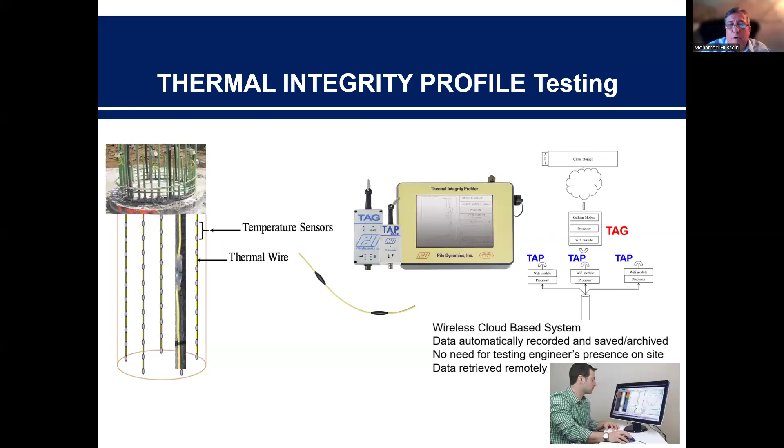There's no testing engineer needed on site. The data is taken automatically, sent to the cloud, and the engineer in the office can follow the maturity, the temperature development in the shaft while it's curing. And these are pictures just showing how these thermal wires are tied to the reinforcing cage.

So we're now taking temperature measurements along the length of the shaft and around the circumference of it. If all of the temperature measurements are read equally, then the shaft must have equal volume of concrete, or the shaft has good integrity. A localized defect will produce a localized reduction in temperature at that location, at that depth, and at that corner of the shaft.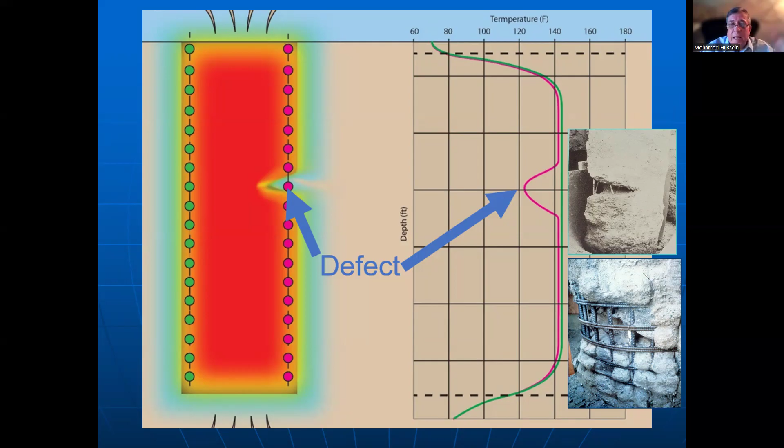Furthermore, if we compare the temperatures along the length of the shaft against each other, opposite each other, if one side consistently shows a higher temperature than the opposite side, that means that the steel cage had shifted inside the concrete, shifted so that one side is closer to the center of the concrete where it's hottest, and the other side closer to the soil where it's cooler.

So from these temperatures, then, we're able to tell from the localized reduction of temperature and the comparison of temperature if the concrete is solid or if we have a defect, and if the steel has shifted inside the concrete throughout the length of the shaft, throughout the cross-sectional area of the shaft.

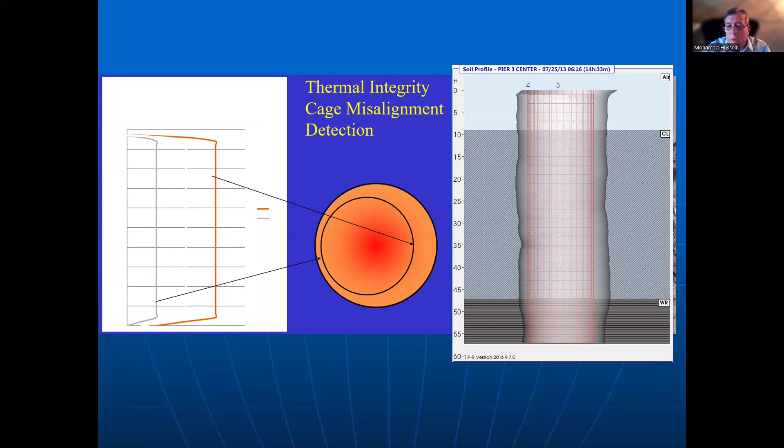And from the shifting of the temperature, we're able to draw a 3D diagram of the shaft showing the concrete profile, showing the defects, and the steel inside the concrete shifting profile. This is important for the evaluation of the integrity of the shaft, the load-bearing capacity of the shaft, and the longevity of the shaft. Because if we know that we have lost the cover, if the steel had shifted enough and we lost enough concrete at a certain location, then that steel may corrode, so the longevity of the shaft may be in question.

And this is showing you how we make the transition from temperature measurement to concrete equivalent, to concrete or cross-section equivalent, by ratioing the temperature along the length of the shaft.

The same thing can be done for auger cast piles. Auger cast piles sometimes do not have a reinforcing cage for their full length, but they do have one steel bar throughout the length. So by taking measurements on that one steel bar inside the auger cast pile, we're able to evaluate and establish a profile area versus depth of that auger cast pile.

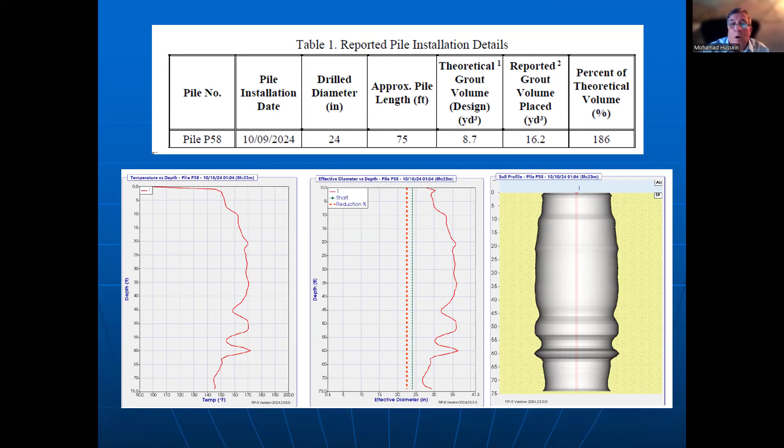The same technology of thermal integrity profiling has been applied to also diaphragm, steel reinforced diaphragm concrete walls.

So we talked about low strain integrity testing, right? We can hit the top of the shaft with a small hammer and evaluate its integrity. This will tell us something about the integrity, but nothing about the load-bearing capacity. Because to evaluate the load-bearing capacity, we have to move the shaft.

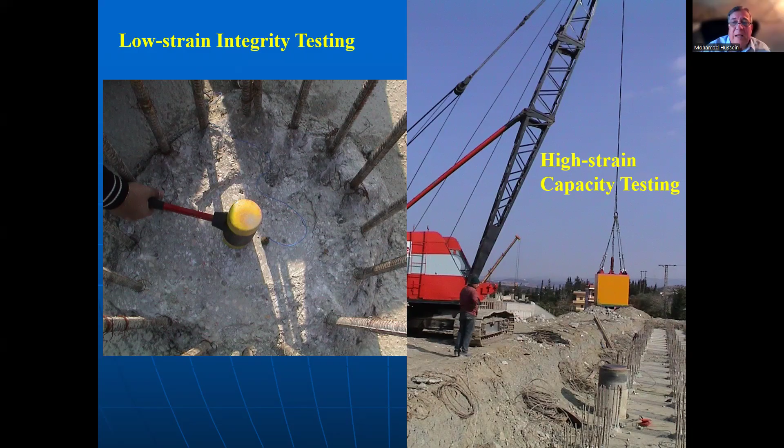We have to move the shaft to activate resistance in order to calculate load-bearing capacity. For that, we have to apply high-strain testing. To do high-strain testing, we need a much bigger hammer, big enough to actually move the shaft to activate soil resistance to calculate load-bearing capacity. Just like we did with pile driving with the hammer, but when we are constructing the drilled shaft and the auger cast pile, we do not have a hammer to drive them like we do with the driven pile.

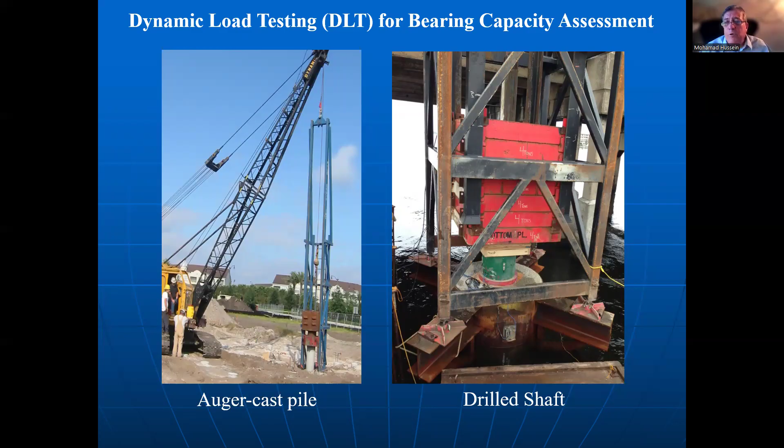We have to bring in a drop hammer. The size of the drop hammer depends on the size of the shaft and on the load we're trying to test for. The weight of the hammer is typically 2% of the ultimate load we are testing to. Same thing with the driven pile.

Now we have a drop hammer on the auger cast pile or the cast-in-situ drilled shaft. We bring the hammer, we hit the shaft with it. We move the shaft, activating soil resistance, and we measure with the pile driver analyzer and the CAPWAP program the wave going down and the wave going up, and we do the normal analyses I showed you earlier that will simulate the static load test, so we do not have to run a full-scale static load test.

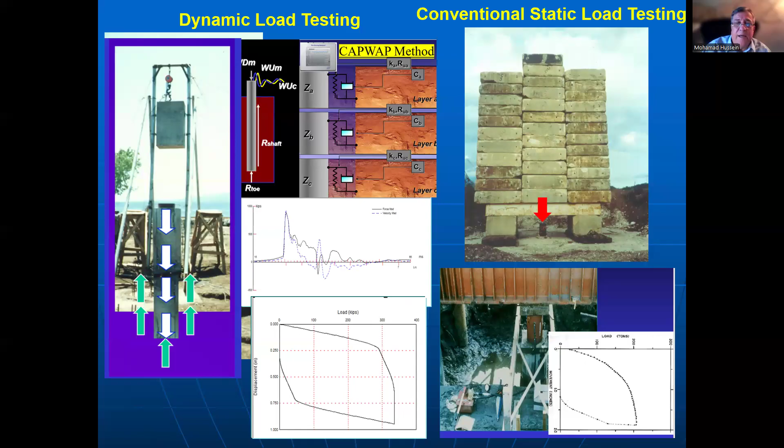So this is a full-scale static load test using top-down measurements, top-down loading. We need all of this dead weight, all of this reaction, so we can put the hydraulic jack on top of the drilled shaft and apply the load for a static load test. This is how we perform conventional top-load static load testing. Very involved and very expensive. And I may add, it could be dangerous at the same time.

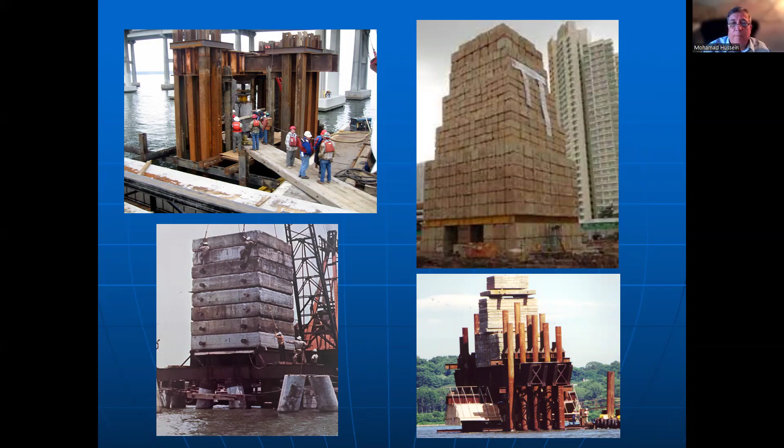What if we try to do it a little differently? Instead of putting the hydraulic jack on top of the shaft, what if we were to put it at the bottom of the shaft? Then we load it bidirectionally: we push up on the shaft for friction and down for end bearing. So instead of a shaft-top static load test, we static load test the shaft from the bottom up using a bidirectional load test. There is actually an ASTM standard for bidirectional load testing as well.

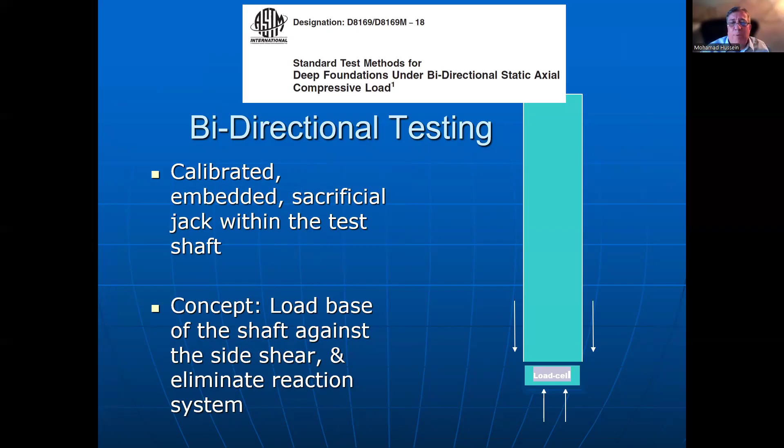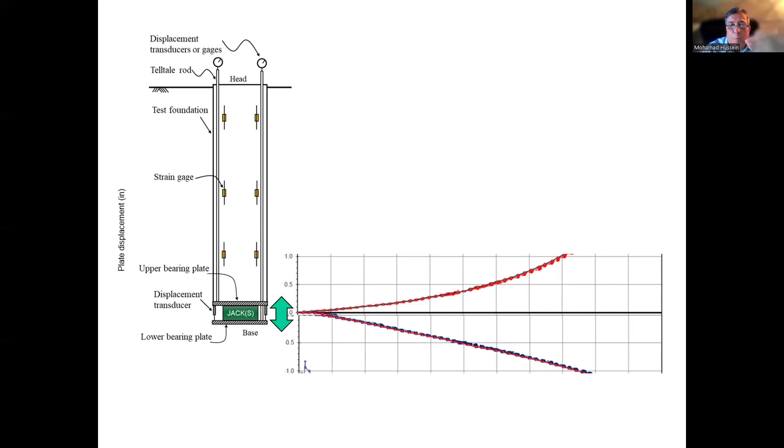So when we apply that load, we measure how much load we apply and we measure the corresponding shaft top movement, moving up in friction. At the same time, we measure how much it moved down in end bearing. We apply more load and see more movement up and more movement down, and we apply some more until one of the two fails - either the skin friction fails or the end bearing fails first. At that time, the test is done.

So therefore, the maximum load we can load the shaft with using this procedure is equal to twice the weaker of skin friction or end bearing, because we need one to load and the other as a reaction against it. Once one of them reaches its maximum resistance, we cannot load the other one anymore.

So this is a typical bidirectional static load test plot showing load versus movement upwards for friction and downwards for end bearing. We can take this information of load versus movement upwards and downwards, friction and end bearing, and convert it into an equivalent shaft-top static load movement graph. From these measurements at the bottom, without needing reaction on top of the shaft, we can simulate a shaft-top load versus movement from the bidirectional bottom measurements.

This type of testing has allowed us to load deep foundations to loads unheard of before. This bridge in St. Louis, for example, is founded on drilled shafts 11 feet in diameter with 23 feet rock sockets. Utilizing bidirectional load testing, one of these shafts was tested to 36,000 tons. Can you imagine loading 36,000 tons with top loading? That would be tremendously expensive, unsafe, and very time-consuming.

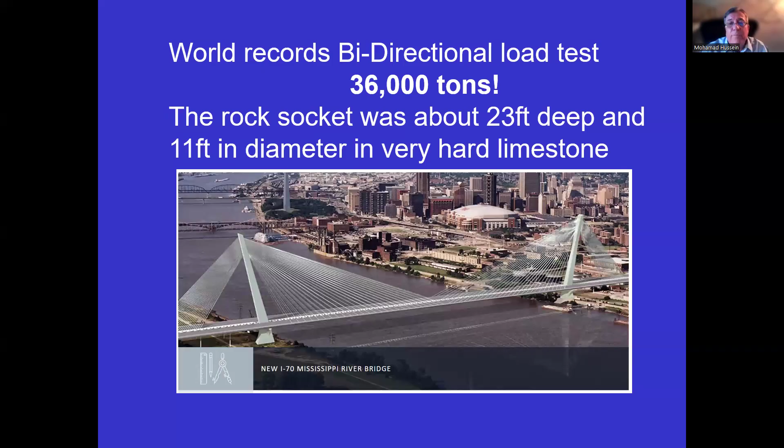All of the procedures I described to you today, all of these tests, analyses, and inspections I outlined are widely available in standards, codes, specifications, textbooks, and conference proceedings. So there's no shortage of information about all of these tests.

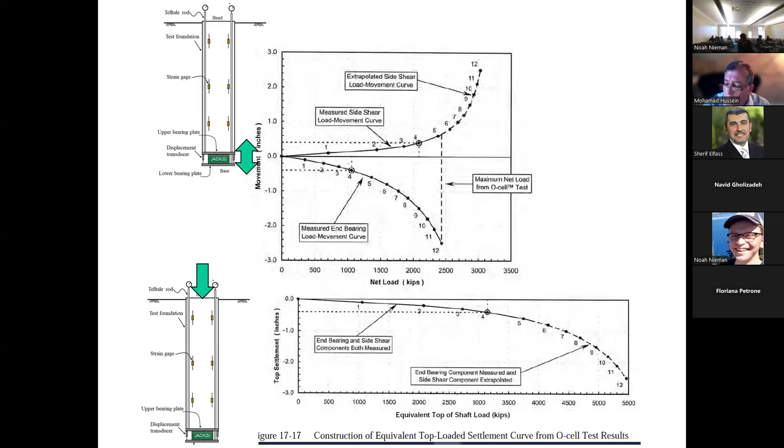I'm curious about the case where it was trying to drive a pile into extremely strong rock. Have there been cases with extremely strong rocks where — my initial inclination is to find some kind of pile we could almost point like an arrowhead in some way? Have there been cases where that happens, or do you just get an even larger pile and push even harder?

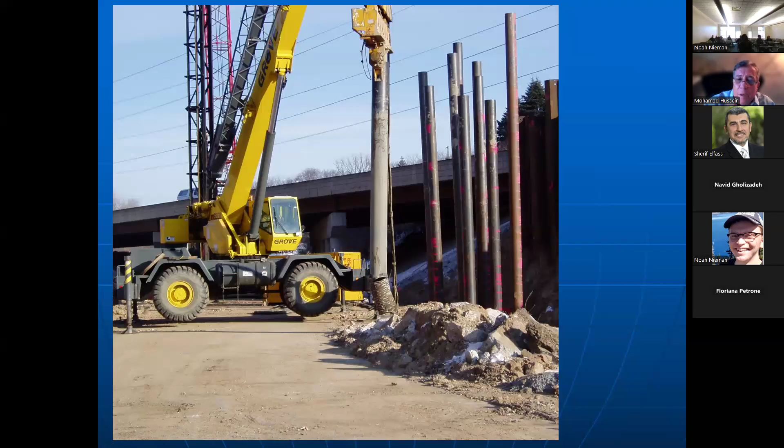So you've reached the maximum load now. The controlling resistance in this case is not the rock, but the pile itself. So if you need more load, you need a larger pile, or the same size pile with more wall thickness and more area — basically a heftier pile. That same solution applies even if you want to push through that layer; it would still just be a heavier pile. Correct. Okay.

Yes, you're absolutely right, and I stand corrected. This applies to piles driven to rock or through hard layers trying to reach deeper — the same applies. Okay, I see.